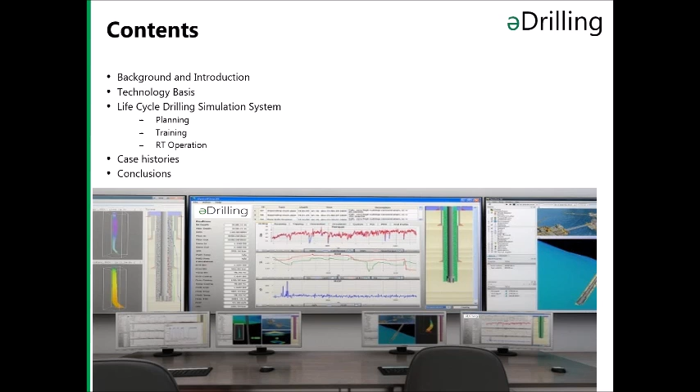I will start this presentation to present a vision for drilling simulation. And this is kind of my own vision for the ultimate downhole drilling simulator. And such a simulator needs to represent the real physics of the downhole drilling process, comprising an integrated drilling simulator which models all the relevant drilling sub-processes. Also comprising a transient flow model with both single and multi-phase capabilities.

This flow model being coupled to a transient thermal wellbore model, calculating the energy transfer in the wellbore and the surroundings. Also incorporating drill string and vibrational model. Further on, a rate of penetration model interacting with the mechanical earth model and mechanical earth data. And finally, the mechanical earth model itself, which needs to include 3D geological, 3D geomechanical and 3D reservoir models.

This integrated drilling simulator also should be visualized in 3D in a virtual reality system, so that you can have a look on what is really going on downhole in the wellbore. Furthermore, my vision is to have this integrated drilling simulator enabled for planning, for training of personnel, for real-time operations and for review of operations after they have been finished. So that this system is coupled together in a total life cycle drilling simulation system.

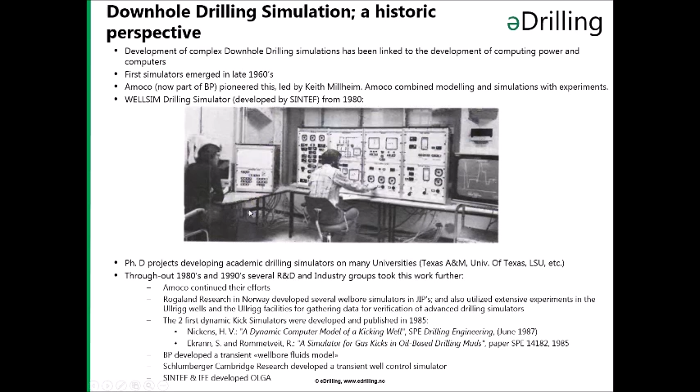To continue this, in the beginning, drilling simulators were only used by experts for planning very special and challenging wells, and after an incident had happened, incidents like kicks, blowouts, lost circulation and so on; they were not used as part of the normal operation. Around the year 2000, some projects were initiated at Rogaland Research and at SINTEF in Norway to develop simulation systems which were linked to the real-time drilling process and driven by the real-time drilling data for the purpose of developing decision support systems as well as drilling automation.

And these systems have matured. Around 2008, in eDrilling, we demonstrated and have developed the eDrilling system, which is now called wellAhead, including also a 3D dynamic downhole visualization of the wellbore.

A new milestone was reached when, in 2010, the downhole simulator in eDrilling called Intellectus was linked together with an advanced drilling topside simulator, hiDRILL, so that you had a combined topside and downhole drilling simulator for training. In 2013, the first lifecycle drilling simulation system with seamless transfer of simulated well states between the different simulators for planning, training and real-time was a reality.

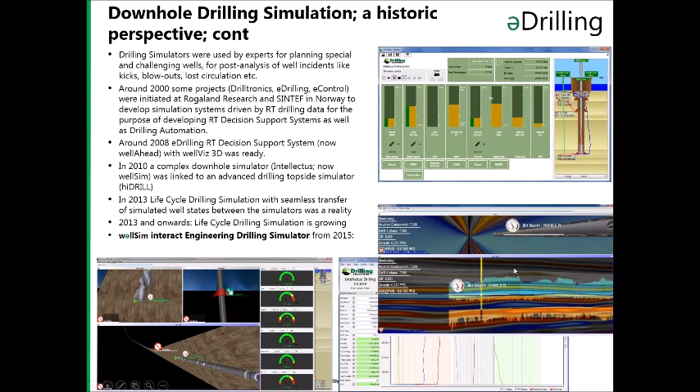I'd also briefly like to go through the history of the eDrilling products. The eDrilling company and products started out of the ongoing research in SINTEF. And in 2004, the eDrilling project was started to develop the eDrilling, now called wellAhead, the real-time simulation and decision support system. This was demonstrated around 2008 by Total and ConocoPhillips, and a prototype was ready.

Around 2010, Statoil came in and supported the development of the big transient training simulator, also incorporating the topside. Moving ahead, the lifecycle drilling simulation was set up in 2013 in China in cooperation with CNOOC. In 2014 we had a large agreement with Chevron, and ConocoPhillips have been continuing to support the development, also now on incorporating an integrated construction and engineering simulator into their facilities in Norway at Ekofisk.

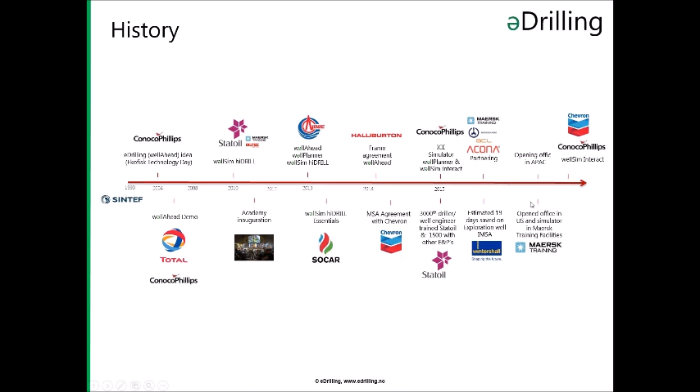We also have had some very extensive training activities. Now more than 3,000 drillers and well engineers have been trained in the advanced training facility in Norway and elsewhere. Now in 2015 and moving into 2016, our company is expanding. We have set up offices in Houston and recently in Singapore. And we are, together with our customers and partners, moving ahead into the future.

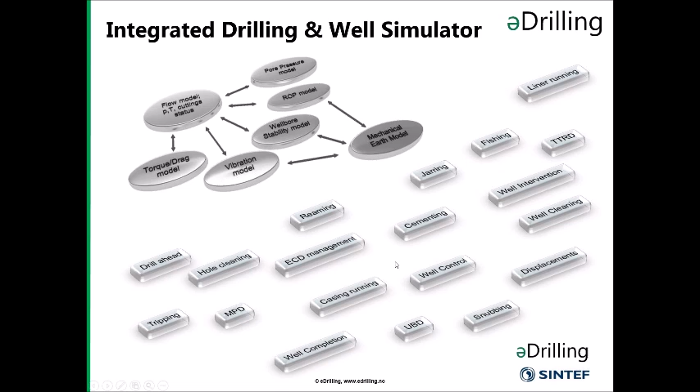Just to show you the complexity of the simulations, here we have the flow model, and this handles all the complexities of the drilling mud properties, the mud compositions, all the different fluids, the densities as a function of pressure, temperature, and component, and the thermophysical properties. In the case of an influx, the model takes care of this: the dynamic reservoir influx model, the gas dissolution in oil-based mud, phase and PVT properties of the mixture, and the multiphase flow. All this is taken into account. There are also additional elements which can be taken into account in special studies, but these are not part of the real-time modeling.

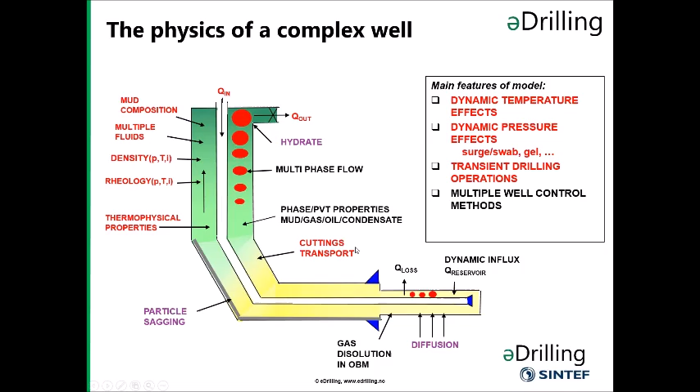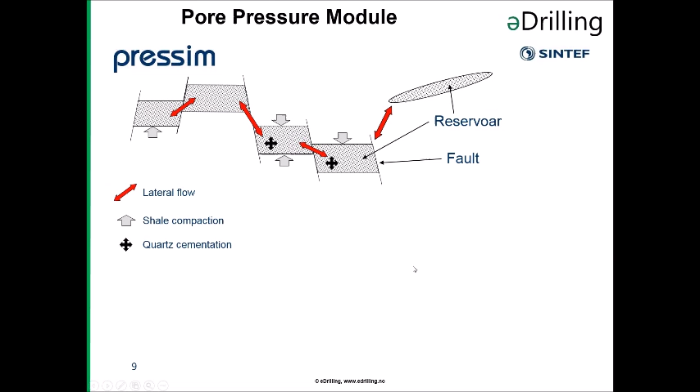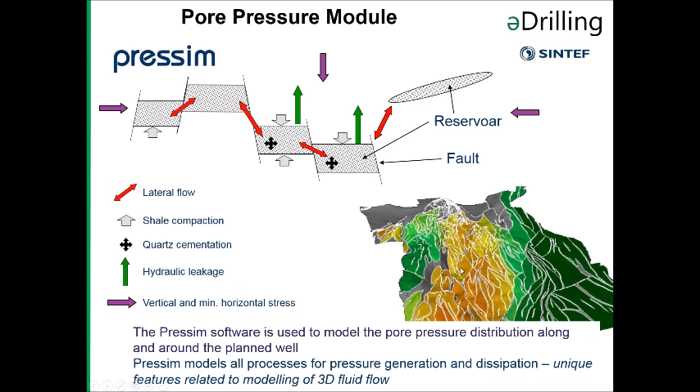The next key technology is the pore pressure module, which also has been developed in SINTEF throughout long extended research. This takes care of the development of the pressure in the formation through historical time, and it models the lateral flow of fluids, the shale compaction, the quartz cementation, the hydraulic leakage, the vertical and minimal horizontal stresses, so that a pressure distribution of the basin we're going to drill into is computed based on historical geological development. This software is then used to model the pore pressure distribution along and around the planned well.

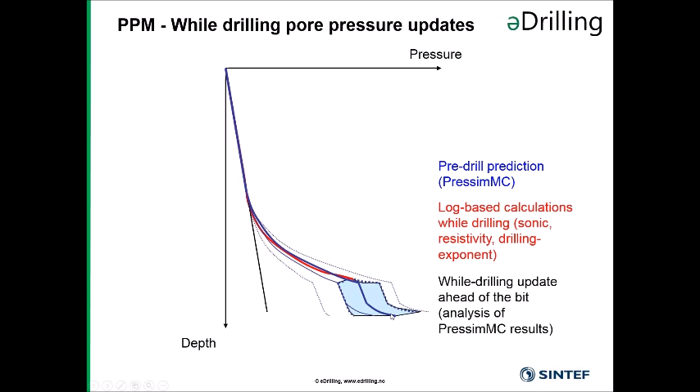During drilling, logs and updated data are utilized in order to, of course, update this profile, so that in the operation we can, while drilling, update the prediction ahead of the bit and have a more accurate prediction of the pore pressures.

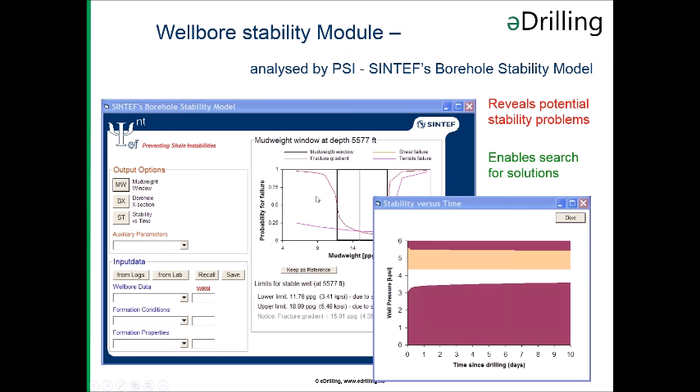Also, in the wellbore stability domain, we have utilized a model developed by SINTEF in our system. And this can be linked into the system by the users. And in this model, the system models the fracture gradient and the collapse gradient for the system which is being looked at.

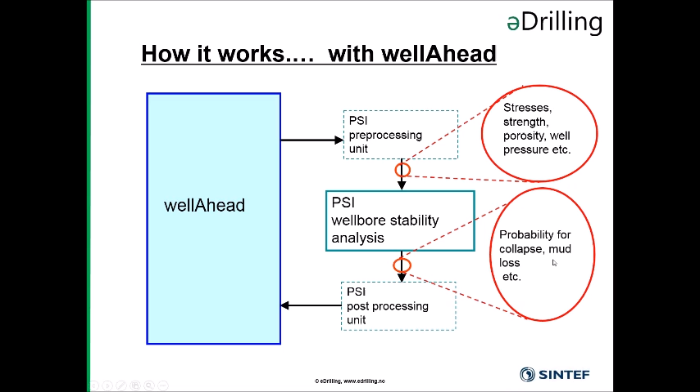And when we are utilizing this in real time and linking this to our wellAhead system, the data from wellAhead is then entered into the pre-processing unit of the wellbore stability model. In addition, stresses and strengths and data from the operation, from logs and so on, are utilized. And a recalculation of the wellbore stability is performed, so that new probability profiles for collapse and mud losses and so on are calculated and entered into the real-time system.

Now the next key element is the virtual wellbore, which is a combination of all the advanced mathematical models, the integrated drilling simulator, and the virtual well visualization. The results of the simulations can then be visualized in the real downhole wellbore environment. And you see an example of this here.

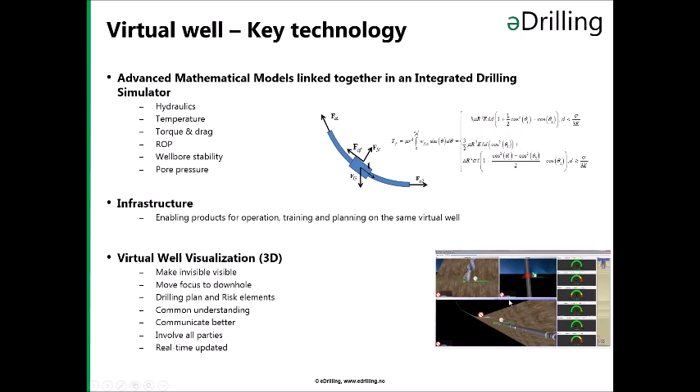And when we put all this together, we have utilized the downhole drilling simulator, the integrated drilling simulator, in the whole life cycle drilling simulation systems, from planning, where we can do what-if evaluations, dynamic planning and post-well analysis, to training, where we can do training of the full drilling teams, testing of new technology, procedure verification, but also interactive drill well on simulator engineering and testing the technical limits.

In real time, the real-time models are then driven by the drilling data. We are doing look ahead or automatic forward looking. We can do what-if evaluations, and the system gives decision support in form of warnings and diagnostics. And both the training simulator, the drilling simulator, and the real-time system are linked to the advanced 3D downhole visualization.

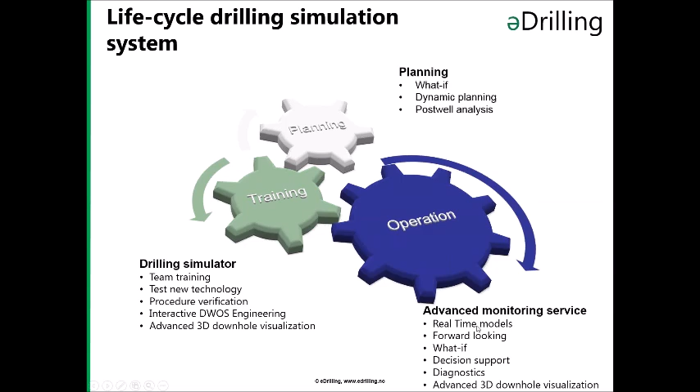Some more details about the products themselves. I will not go into any details. This is listed in the handouts you will get via the internet. But just to say that the wellPlanner, the planning system, is a suite of applications focusing on dynamic, advanced evaluations prior to drilling a well.

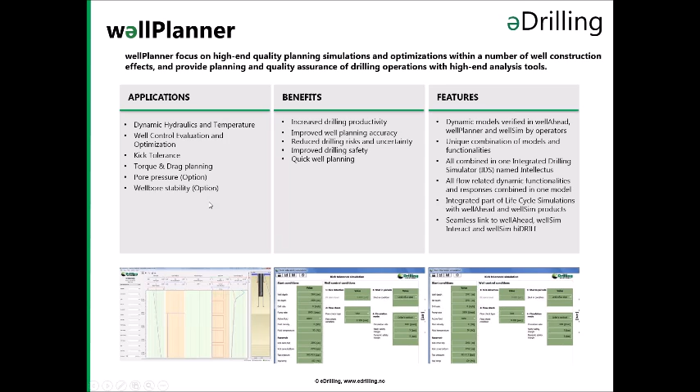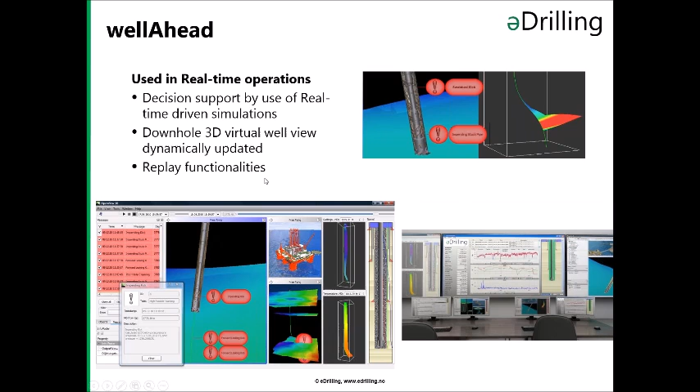Then we move over to the real-time system called wellAhead, and when we run this system, the simulation is driven by the drilling data themselves and the operation itself, and this is linked to the dynamic 3D virtual wellbore, and you see some examples of that here. There are also some replay functionalities in this system, so that you can also replay an operation afterwards.

Features of the wellAhead are that it gives automatic warnings and diagnostic messages, automatic drag charts, compares stress versus yield, and you can also compare simulated versus real-time data if you want to verify the diagnostics and warnings.

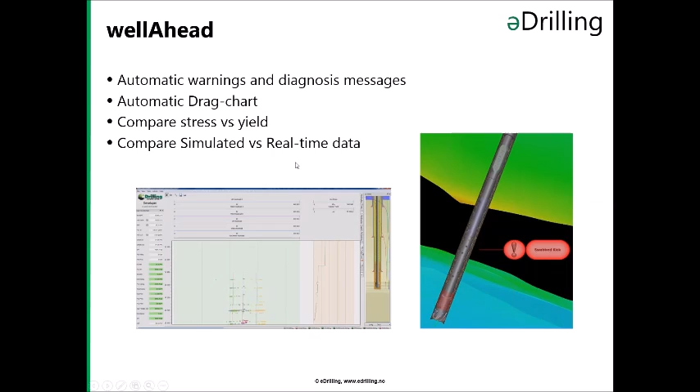So to summarize the wellAhead, this has demonstrated to be a very proactive system and not reactive. It gives an automatic supervision of the drilling window. You can automatically update the pore pressure and wellbore stability during drilling, and you can also during operation get diagnostics and warnings on important characteristics down in the wellbore, which have impact on both safety and technical quality of the well.

In addition, automatically the system gives a forward looking of the downhole ECD and the torque drag for the next drilling period, and it has, you could say, capabilities to be a virtual downhole pressure while drilling sensor, which is a virtual sensor because it calculates the downhole pressures, but it really gives very good calculations.

And here we see some examples of screen pictures, 2D plotting here, the examples of the 3D on the top here, and we have also two other examples of how the 3D virtual well can look.

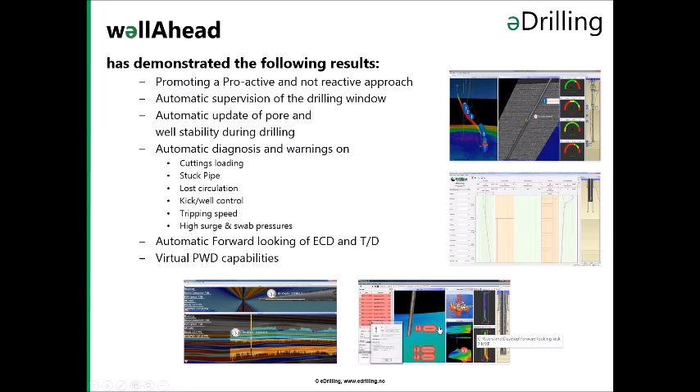This real-time system is quite unique. In the bottom it has verified dynamic models. It's linked to 3D downhole visualization, and also the models are linked and visualized in this visualization. As I mentioned, it has automatic look-ahead capabilities. On the fly, you can also do what-if simulations by extracting the calibrated model out of the system and do your own what-if evaluations.

It does dynamic modeling of the operation in all the transient phases. And it also provides integration between dynamic planning, real-time operation and the simulator systems which are available in the life cycle drilling simulation system.

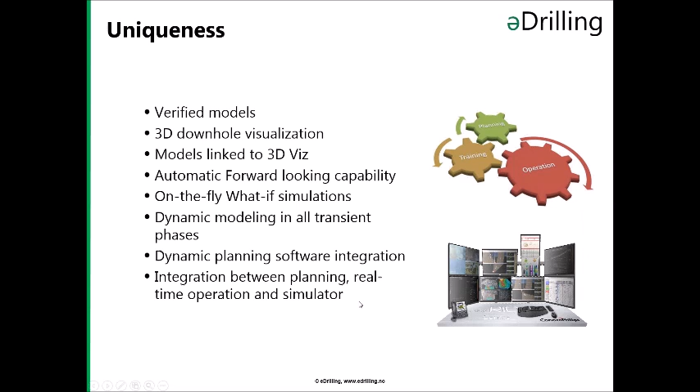This slide gives you a lot of details about the large training simulator. This is used for training of drilling personnel, and here you see we have linked an advanced topside rig simulator from Oiltec Solutions, the hiDRILL, together with the WellSim, which is the advanced downhole simulator. On this simulator you can train on your own well, so to say, and you get very realistic feedback from the wellbore.

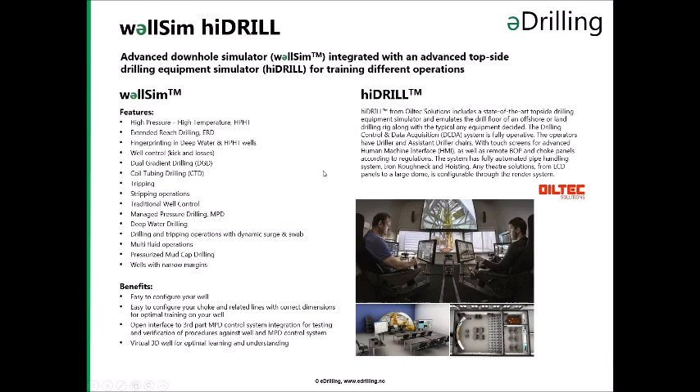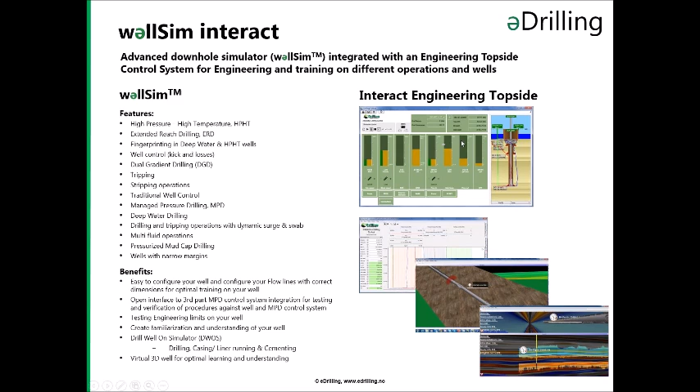We have developed an engineering version of the WellSim, which we call WellSim Interact. This is an interactive simulator, and here we have a very simplified engineering topside so that the engineers themselves can sit and control the drilling interactively. Apart from the control side, all the other elements are very similar to the large training simulator, but this is especially focusing on engineering, on training of engineers, and also on testing the technical limits in the well you're going to drill.

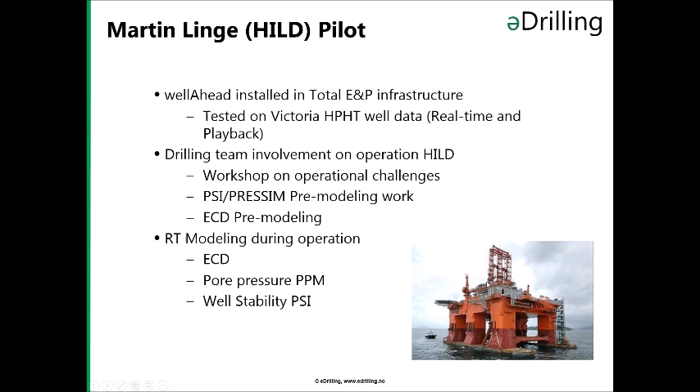Now we will move from technology and the products over to some cases where the products have been used. First we have the Martin Linge pilot. The Martin Linge pilot was performed as a kind of prototype demonstration of the wellAhead system. In this case, we first tested it on an advanced well, which was drilled prior to the Hild well. Then we did a lot of pre-modeling work in order to be ready to do pore pressure and wellbore stability updates during the operation. During the operation, we did real-time modeling of ECD, pore pressures, and wellbore stabilities.

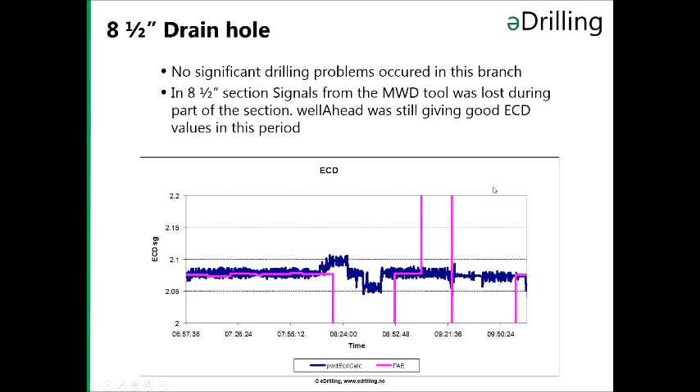This is an example showing how the system functioned regarding calculation of ECD. Here in blue are the calculated ECDs, and in pink are the ECDs measured by the downhole sensors. You see, when the downhole sensors did not function, the model functioned very well, and when the downhole sensor came back, it was spot on what was modeled. So in reality, it shows that the downhole modeling can be used for some periods if the downhole pressure sensors fall out and don't function. Then you can avoid pulling out of hole, for example.

To summarize the value of using the eDrilling system on this well, this was summarized extensively together with Total in a report and also in a paper. Approximately 2 weeks of rig time could have been saved, and also a lot of materials, mud. We could have avoided mud losses and maybe avoided the squeeze cement jobs. So altogether, the potential of using eDrilling on this well could have been very high.

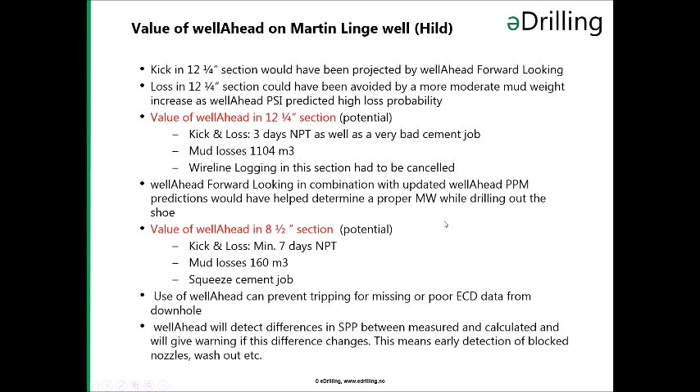However, Total chose here to run this as a pilot. So they ran their traditional methods, and alongside that, they ran the full eDrilling system. But they used their normal procedures in the well establishment. This is documented in a paper.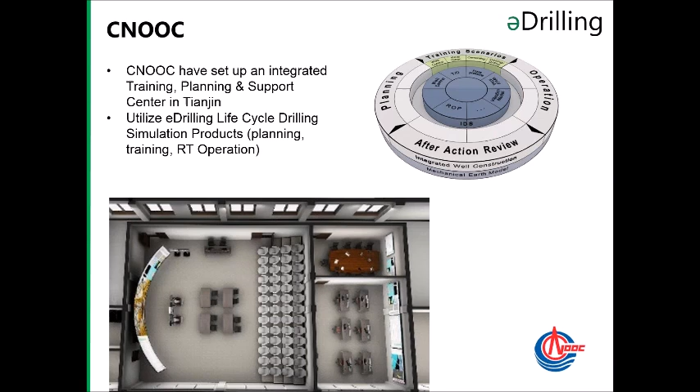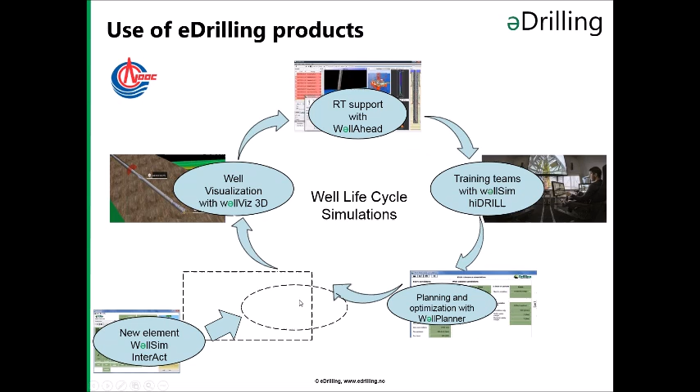The way it's been used at CNOOC, when the personnel received wells, they would normally follow them with wellAhead and support them 24/7 with support from 3D visualization. At the same time, another group of engineers would focus on planning and optimization, would support the currently monitored wells, and would handle requests from drilling supervisors. The team of supervisors and offshore personnel would be trained on hiDRILL. But now, since CNOOC showed interest in the new product WellSim Interact, they would like to integrate it into their system and the complete well life cycle simulation.

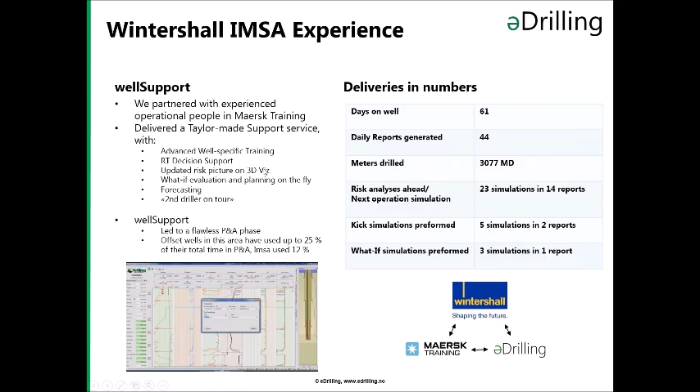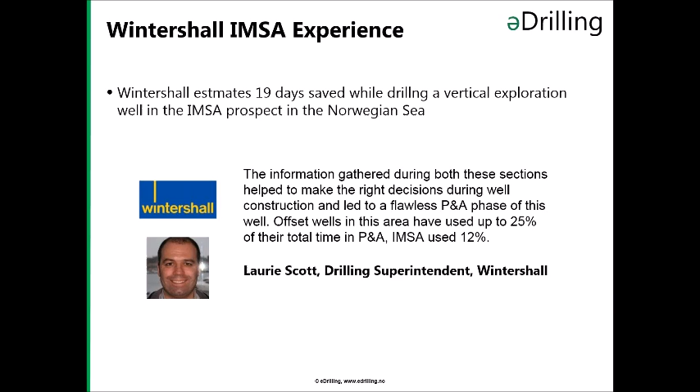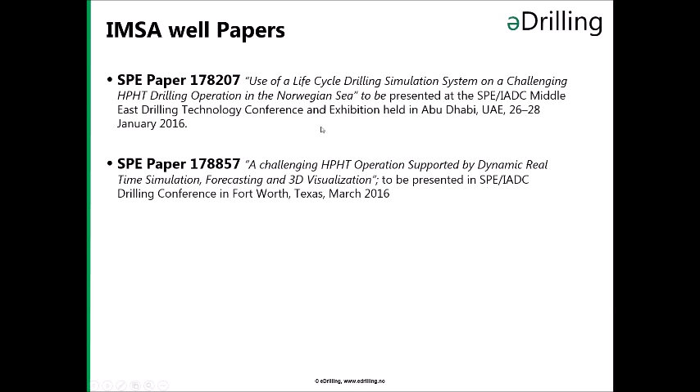We also have a very good experience in cooperation with Wintershall on the IMSA well, where we partnered with Maersk Training in order to use our products and to do support for Wintershall in this operation. To summarize, in the evaluation afterwards, Wintershall estimated that they saved 19 days compared to a standard operation due to utilization of the eDrilling models and the support from the personnel of eDrilling and Maersk Training. So it was a very good result. There will be some papers documenting this next year, published in the SPE environment.

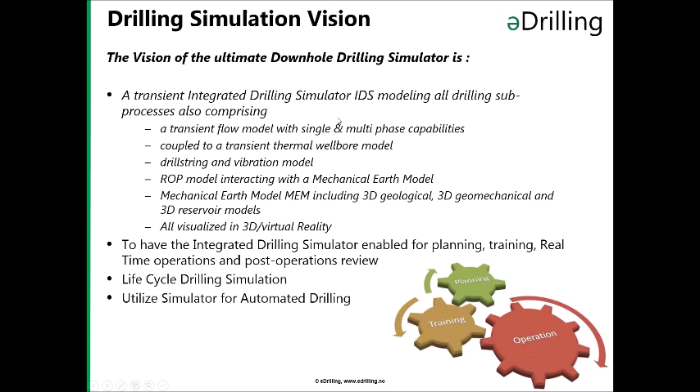Now coming back to the vision again, I want to revisit this before I go to the conclusion. The same vision which I started the presentation with. The first point: advanced downhole drilling simulators have come a long way from R&D and expert tools in the 1980s to today being integrated in operational support and automation. So the vision is approaching, and it's realistic to reach. Life cycle drilling simulation systems are today utilized by major oil and gas players around the world to reduce cost and improve safety during well construction.

Real-time data-driven modeling and decision support has been used with good results in challenging drilling operations, and significant savings and reductions in NPT have been achieved and can be achieved by continuing to use this. And finally, to combine transient modeling in the whole life cycle of well construction, from planning through training, real-time operation and lessons learned, can generate lower costs and increase safety.